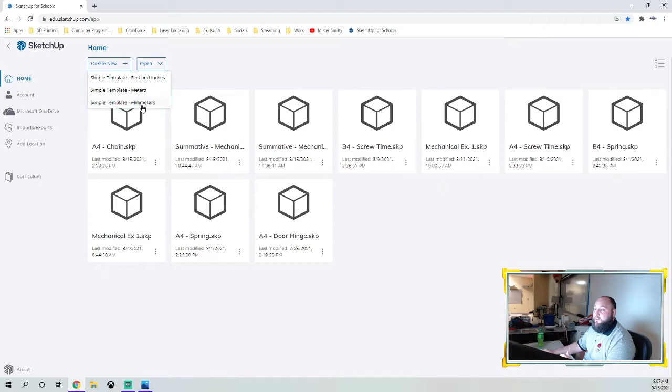First things first, go into your Google SketchUp for schools. Once you're there, go to Create, New, and we're going to do millimeters today. The reason is that if you look at the model I want you to do today, all of the measurements are actually in centimeters, so we'll just convert at the end between centimeters and millimeters.

So 15 centimeters is actually 150 millimeters. You just have to move the decimal place one.

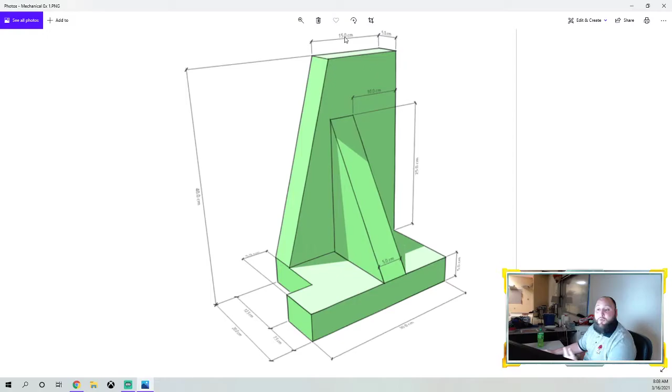Inside of Google SketchUp for schools, I'm going to go ahead and save first, and I'm just going to call this Mechanical Exercise 1. That way I've named it.

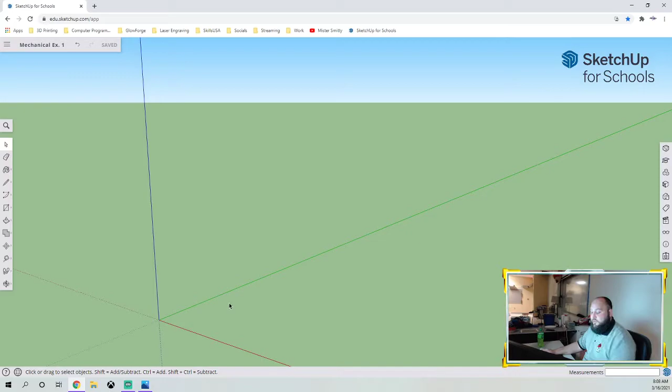Now I'm going to pull up my drawing here, and I'm going to see if I can do a nice split screen today while we're working.

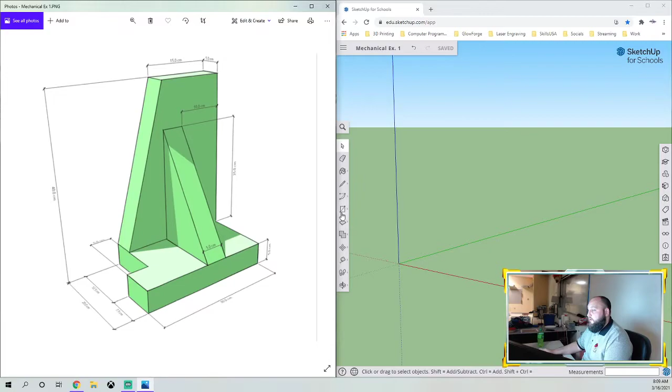I'm going to start with this bottom piece. I see that it is 30 centimeters by 20 centimeters, which means it actually needs to be 300 millimeters by 200 millimeters. So I'm going to type in 200, comma 300, so that I can get the 20 by 30, or the 200 by 300. I'm going to pull this up a little bit so y'all can see.

As I'm working, I like to dimension, and I suggest you do the same. If I go over to my tape measure tool, underneath tape measure is dimension. The way it works is you click 2 points and then drag your mouse off to the side. You can see now that that is 200 millimeters, and then I click and click, and that is 300. So I'm on the right start.

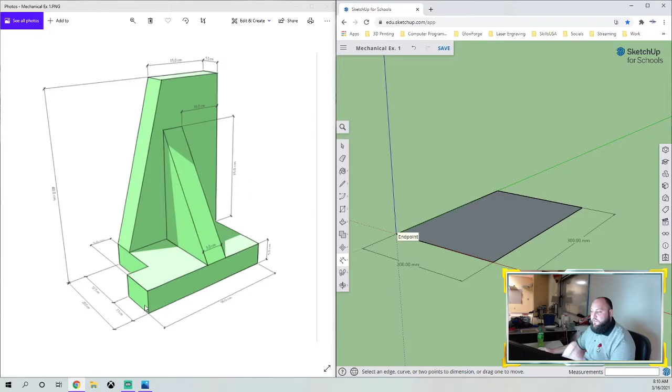The next thing I need to look at is right here. This is actually 5 centimeters tall, so that means I need to go up 50 millimeters. I'm going to pull this up and type in 50, enter. Then I'm going to grab that dimension tool again, and I see that it is 50 millimeters.

So what's important here is I am 3D modeling, but I'm also dimensioning as I go. This is how I want you to approach it.

Now I need to make this cut right here, which I see is 5 centimeters by 12.5 centimeters. So that's going to be 125 millimeters by 50. I grab my rectangle tool again, I start to draw, and I do 125, comma 50. Remember, I got to multiply by 10.

Let me go ahead and do the push-pull cut. I'm going to push it down to the edge and make sure it says on edge, then let go, and it'll do that cut.

Now let me dimension. If I go from here to here, I see that that is 50 millimeters, which is what we wanted. And if I go from here to here, I get 125, which is also what we want. So as I'm going, I'm just dimensioning through this.

Now I'm going to grab the rectangle tool again because I want to make this back piece. The first thing I see is that this back piece is 40 tall, but minus the 5 we did, that means it's 35 centimeters tall, so 350 millimeters.

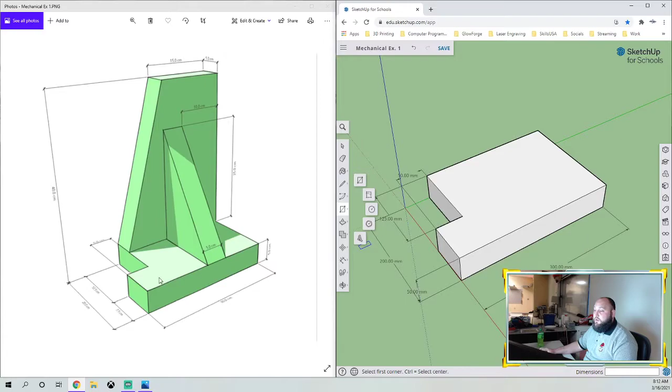But first, I need to actually draw this bottom rectangle first. The bottom rectangle is 30 minus 5, so that's going to be 250 millimeters by 50 millimeters. I'm going to go to draw that.

This will be 50 comma 250. Nope, I got it backwards. So it's going to be 250 comma 50. And there we go, see, it lines up perfectly.

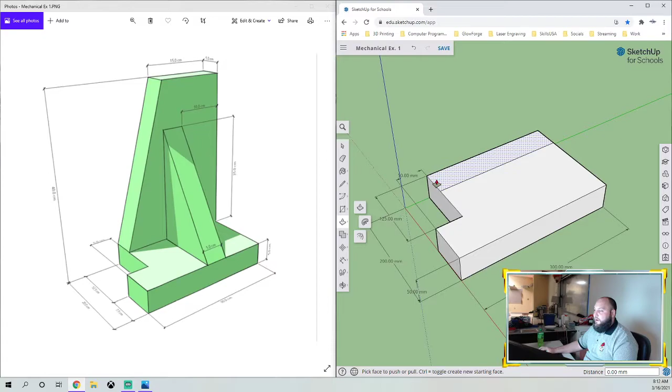And like I said a minute ago, we check our height. We got 40 minus 5, which is 35, so that means we need to come up 350. Now this is what I'm working with.

So I need to do this cut right here, but before I do that, it's always important to go ahead and dimension. So I'm going to dimension this side.

It's 350. I'm going to dimension this top, on this side over here. That's 50. And we also need to dimension right there.

All right, so now I need to do this cut. And what I see on this cut is that it's 15 from the edge.

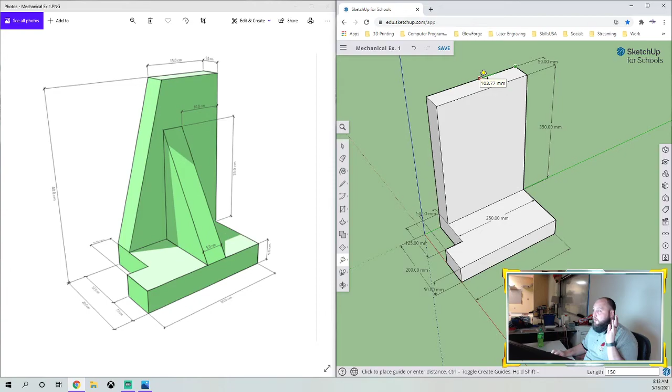So to measure out 15, I need to take my tape measure tool and click that corner and start dragging along this line. Then I do 150 enter, because it's 15 centimeters, so that's 150 millimeters.

It put this mark for me. So I can draw across now, and I know that from here to here is where that line needs to go, where I need to put my line to do the cut. Same thing, I'm just going to cut it.

All right, I'm going to grab my dimension tool again because I want to pull this out a little bit more. And then I need to dimension this right here. All right, and otherwise, I think we are good.

All right, so now I need to do this last part, which is right here. So I need to figure out exactly where to draw this rectangle. I can see that that rectangle is 10 centimeters in. So I'm going to grab my tape measure tool, and I'm going to measure in.

100, because we're using millimeters. If I needed 10 centimeters, which is 100 millimeters, that's 100 millimeters in. And I know that it's 5, so I'm going to draw another one that is 50 over, because 50 millimeters is 5 centimeters.

All right, so at this point, I know that my rectangle is going to be between those points. So it might actually be better if I just take the line tool here and draw 2 lines straight across, so then I can pull this up. But how tall is it?

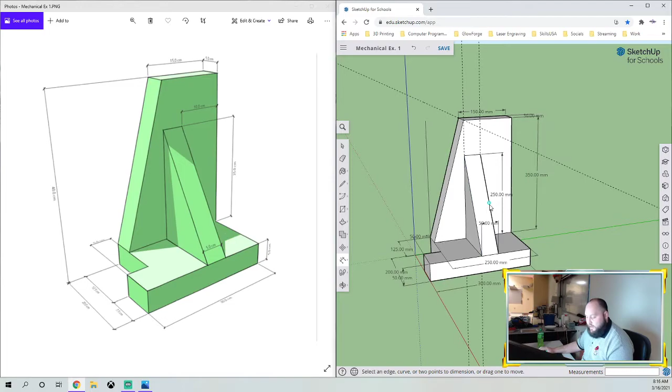Everything is perfectly dimensioned. So the last step is I want you to put your name on it. So you're going to go to where your rectangle tool is. Maybe you have your circle active, I don't know. Just make sure you have your rectangle tool active.

And then if you click that, you'll see that you have this little 3D text option. I want you to click on that, and you're going to type your name. All right, so I'm typing Mr. Smith. I'm going to pick a font.

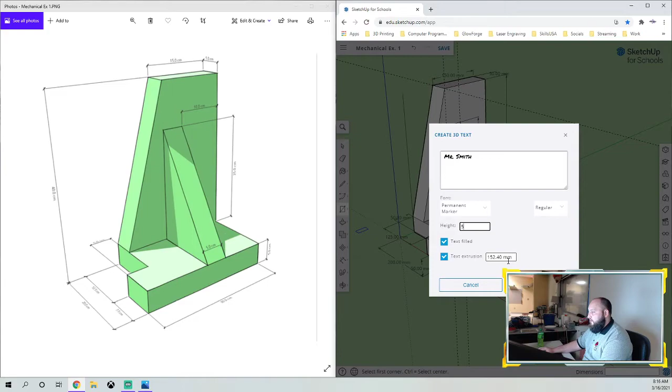Maybe I'm doing permanent marker, make it a little goofy. And then let's just say maybe the extrusion is 5 millimeters, and the height is 10. All right, and that'll just kind of put my name.

If I press S on the keyboard, I can quickly scale that. All right, let me zoom in. I can scale it up, make it a little bigger.

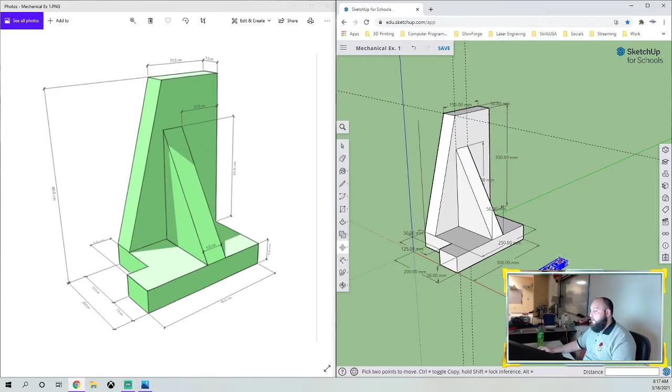And then if I press M on the keyboard, I can grab one of these and move it. Maybe I want to put it on. You know, you can either put it next to or put it on. If you want to put it on, just grab one of the corners, and maybe I want to put it right there.

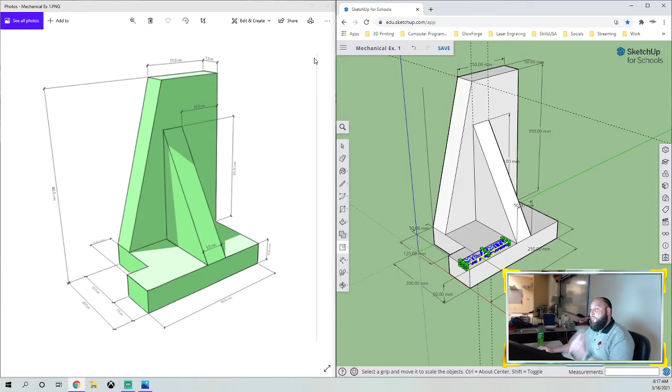So now I'm going to press S again, and I'm going to scale this down. So there we go. I've got my 3D model with dimensions, plus I also have my name on it.

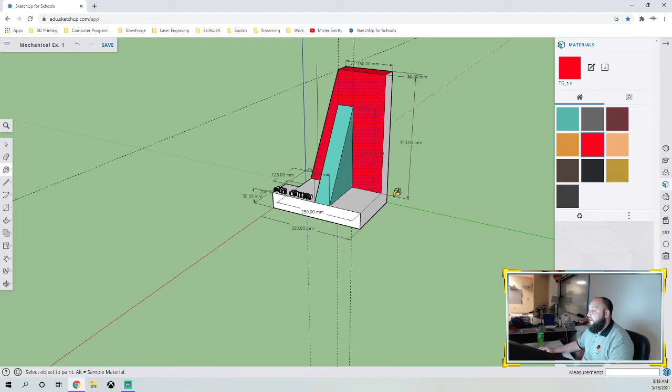All right, very important, I want you to put your name. And as always, if you want to add appearance, you can go over here, open up your appearance bar. Maybe I want to add a little bit of appearance to it, just to kind of differentiate between the pieces. I'm more than okay with you having a little fun with it, guys.

But other than that, that is it, guys. And that's it for mechanical exercise 1. We will be working on a summative later, and we will be doing something very similar.